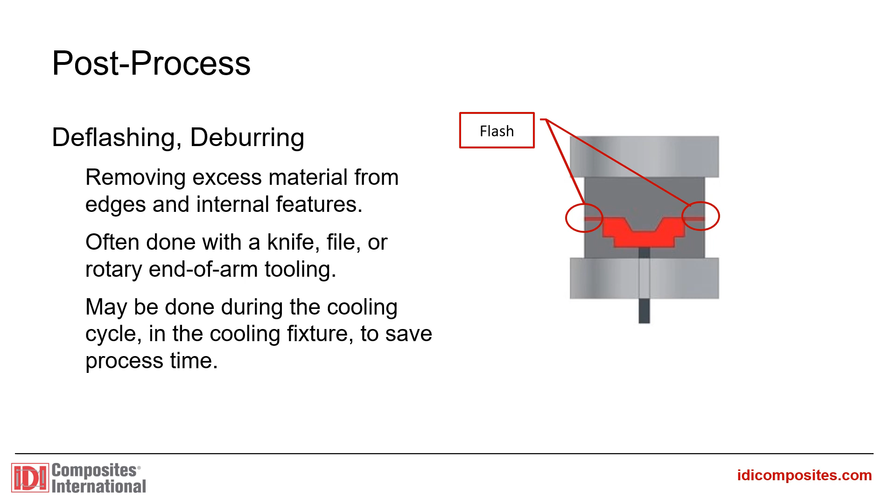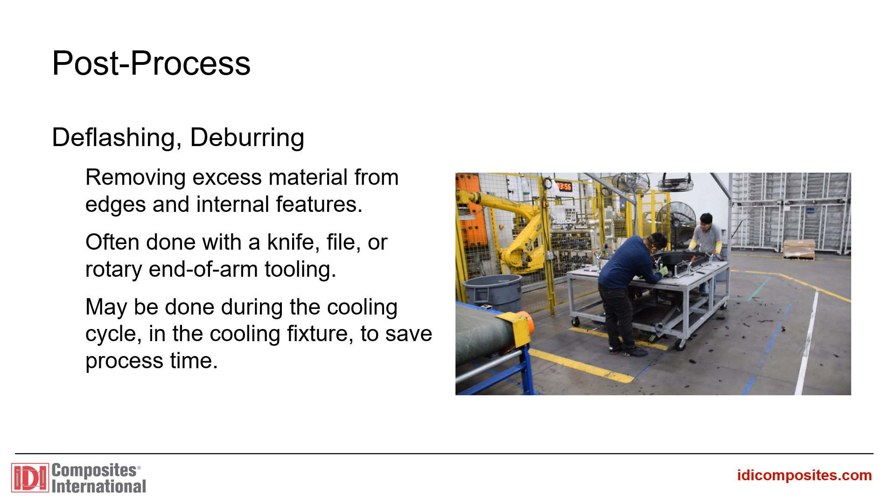As with most molding operations, SMC parts have an inherent amount of flash at the parting line or shear edge of the mold. Flash is a resin-rich excess of material that ensures the part fully filled and consolidated. There should be some flash on any part. Removal can be achieved with something as simple as a knife or file run around the edge of the part. More advanced operations may employ a multi-axis robot with rotary end-of-arm tooling like a router to remove flash.

If the cooling fixture is designed carefully, it is possible to deflash the part during its cooling phase. In addition to cutting off excess flash, interior details like holes, knockouts, and windows may also require cutting. These areas are typically molded over with a very thin layer of SMC called a mash-off and can be routed out after molding.

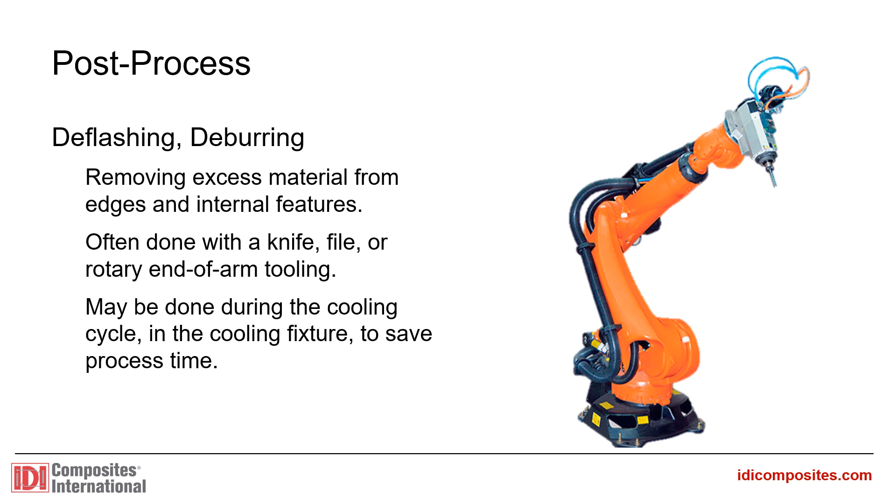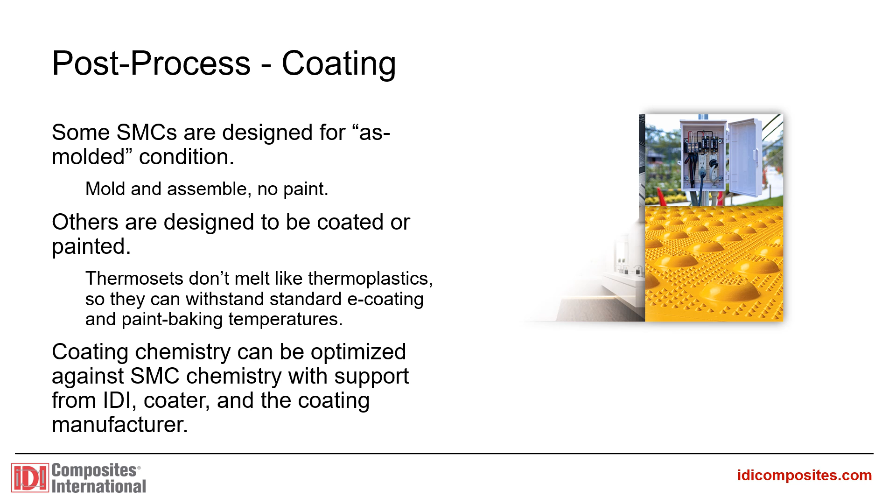SMC formulations vary greatly. Some are designed to ship as molded and are appearance grade out of the mold. Others are designed to be coated in some manner. Thanks to the nature of the thermoset reaction, SMC molded parts can withstand the high temperatures typically associated with commercial e-coat and paint then bake lines. It is possible to optimize the coating chemistry with the SMC chemistry, and IDI is happy to work with our molding partners, coating partners, and their coating suppliers to find the right solution.

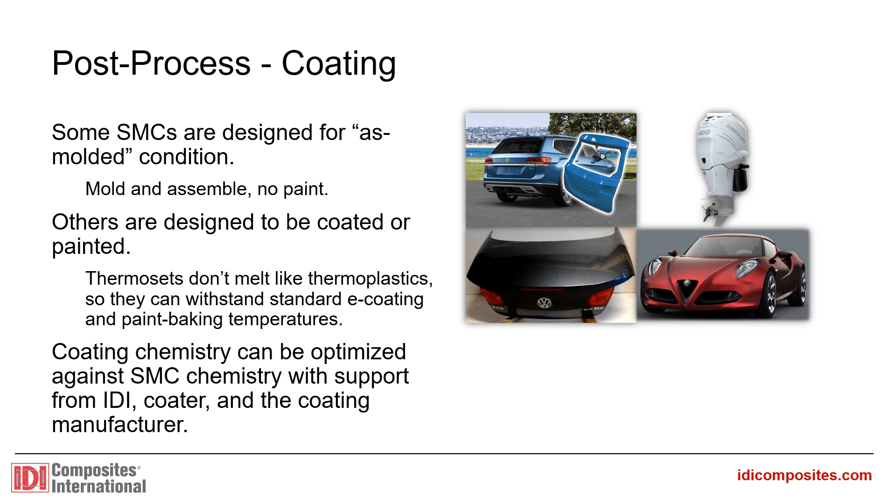One or two-part bonding is common with composite parts to secure them to one another, or to other substrates like metals, glass, or other plastics. As with paint, it may be possible to optimize the bonding chemistry for a given SMC formulation. Again, due to the nature of thermosets, the molded part will be able to withstand the high temperatures associated with two-part bond reactions and curing.

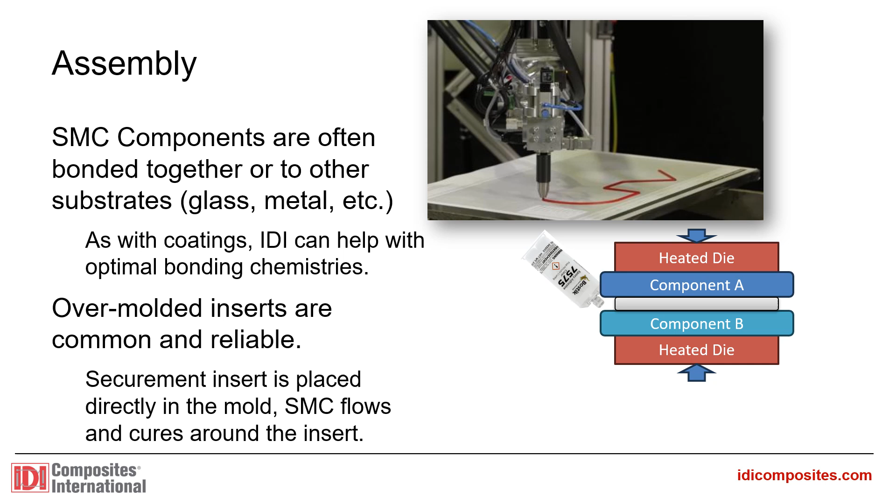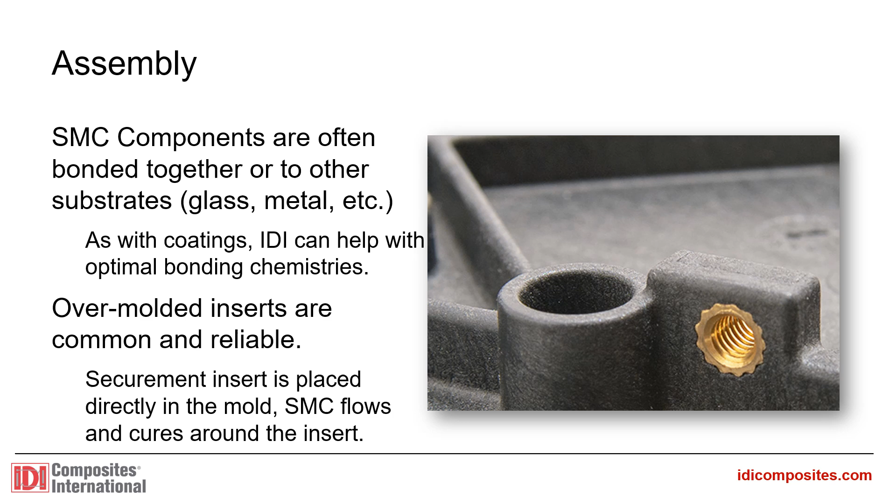Besides chemical bonding, it is also possible to place various fastener types directly in the mold and to flow the material around the insert, making it a permanent component. This process is called overmolding and is a very reliable way to add threaded inserts to your assembly without a secondary process.

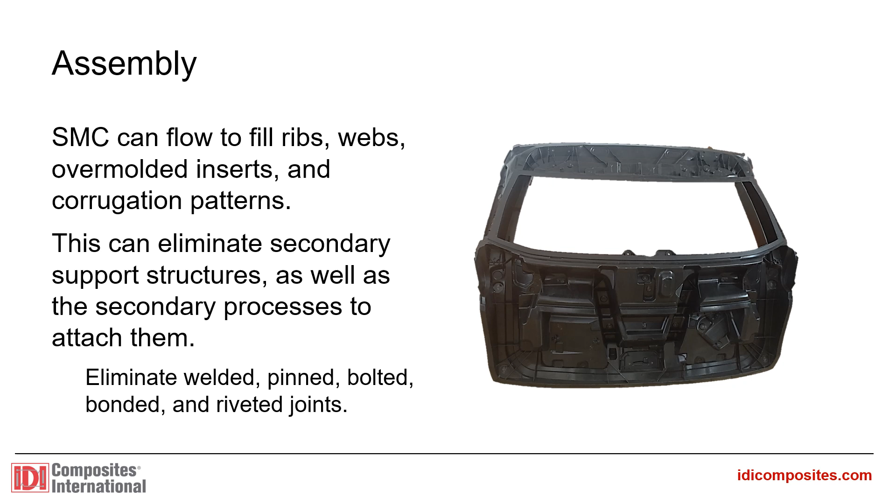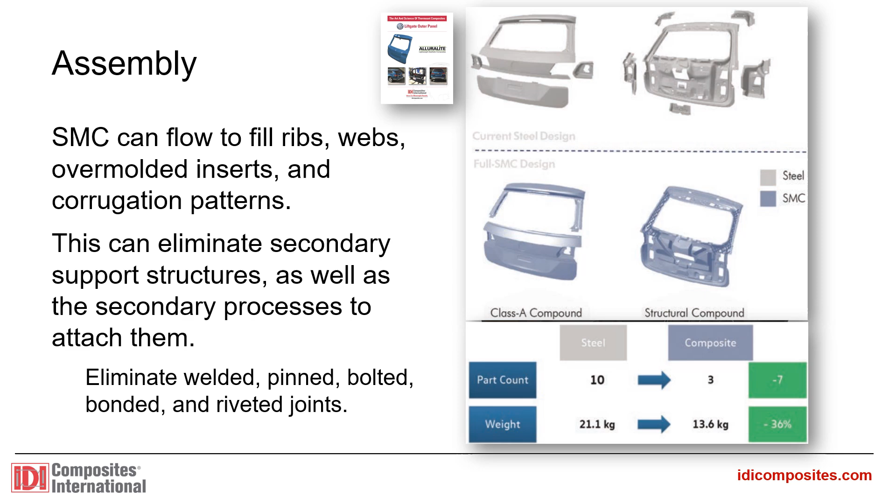SMC has the unique ability to flow to fill ribs, webs, overmolded inserts, and corrugation patterns. This is an important consideration in material choice for a project because it can greatly reduce or eliminate the number of subcomponents and subassembly operations required to produce a finished assembly. Where a stamped component may have an outer aesthetic surface, an inner support, and a welded or riveted interface between the two, the compression molded part serves as both aesthetic outer and substructure unto itself, eliminating a part and process entirely.

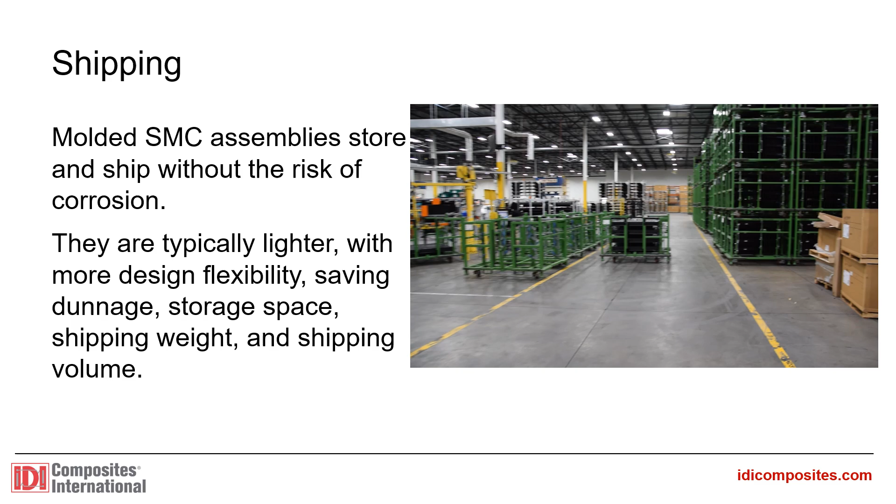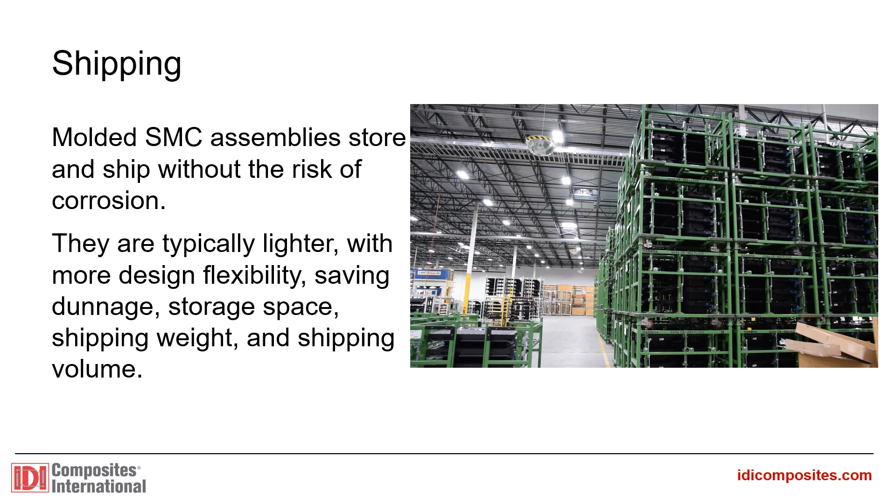Once all finishing and assembly operations are complete, the part is ready to ship. SMC won't corrode in transit or storage, and with greater design flexibility and typical weight savings, benefits can extend into storage space, dunnage type, shipping weight, and volume. Lighter parts with fewer subcomponents, which are simpler to rack and store, all speak to operational efficiency and excellence.

This concludes a brief overview of post-processing of SMC composite parts. Obviously, any number of conventional processes could be applied to a molded part. Deflashing, bonding, and coating tend to be typical of a molding and value-added operation.

The next segment wraps things up and gives a high-level view of what it takes to get started with SMC.